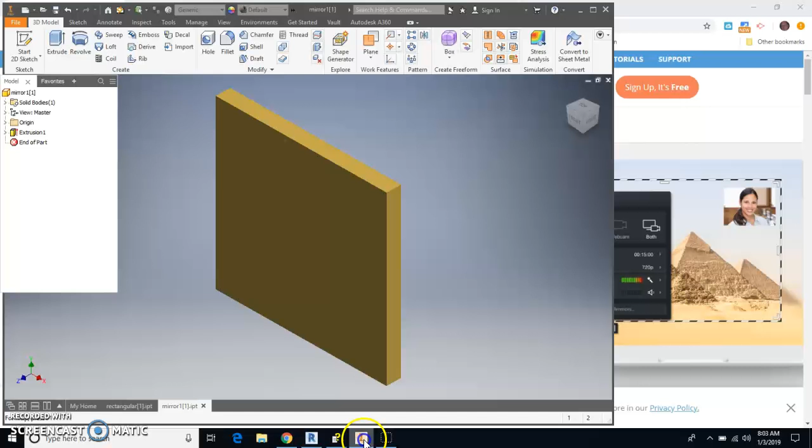All right, next up is the mirror pattern features. And this is quite an involved one. We're actually only going to draw this lower left-hand corner, and then after that, we're going to use the mirror command, the 3D mirror command, to make the other three quadrants here.

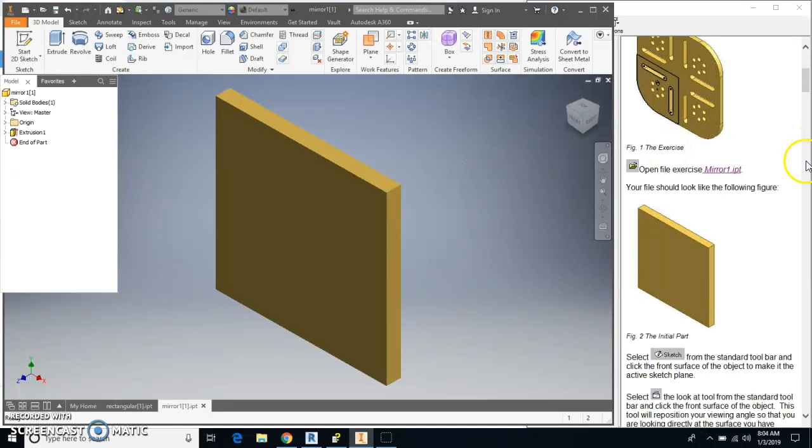So first thing is to click on mirror1.ipt, and make sure you save this. Do a file, save as, and find your H drive, and save this to your H drive. Now, we need to do a 2D sketch right on that front surface, and we're going to make this geometry that is right here on the part.

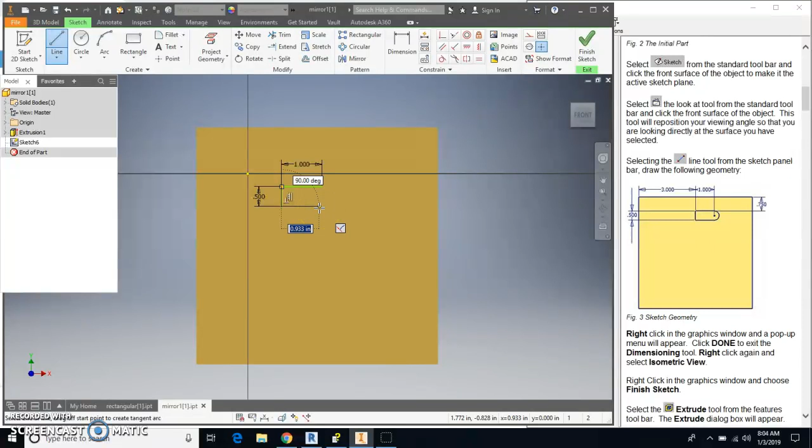So I'm going to start by drawing a line, and I'm just going to draw a straight line that is 1 inch long. And then actually I'm going to restart my line command here. I'm going to come to the left-hand end, and I'm going to come down 0.5 inches. And then back to the right here, 1 inch. Now I'll hit escape. And there's a couple different ways we can do this radius on the end.

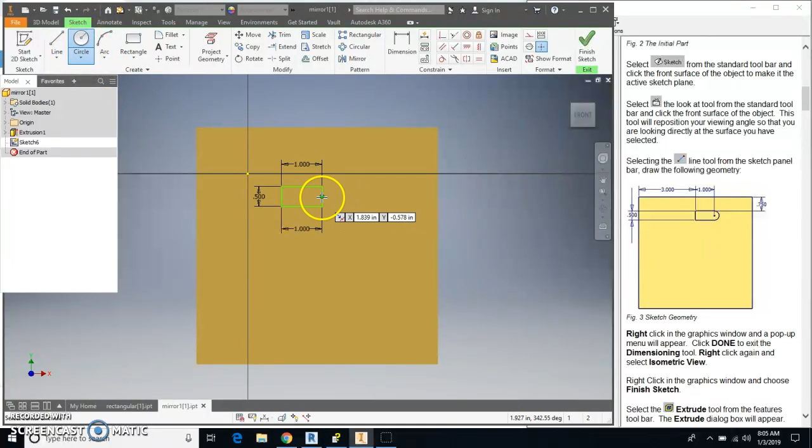Probably my favorite one would be circle center point. That's pretty easy to do. I'll just draw the line here on the end. Oops. Escape. Got to actually get the end of the line. There we go. And then I'll start the circle command. I go from the middle of the line to the edge.

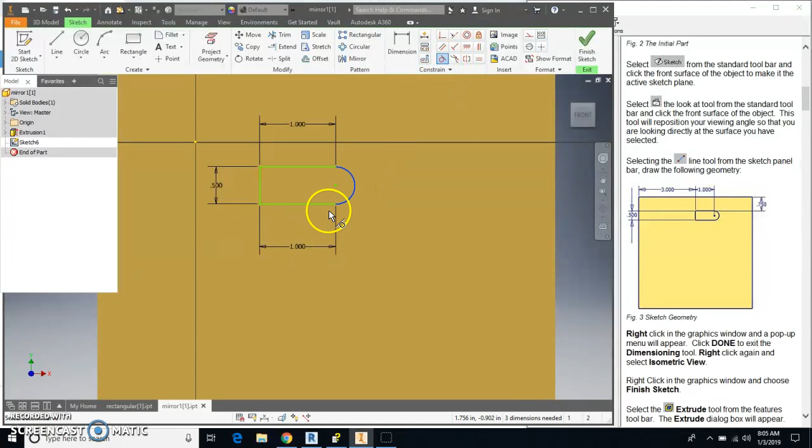And I'll use the trim command to get rid of this inside part here. And then I'll click on that line and just press delete to get rid of that. And that leaves me with that circle. Now, mine looks a little goofy, so you might have to do this. I might not even have to do this. But I just use the tangent command between those two. See, that one didn't need to be there. But anyways, so now I've got this done.

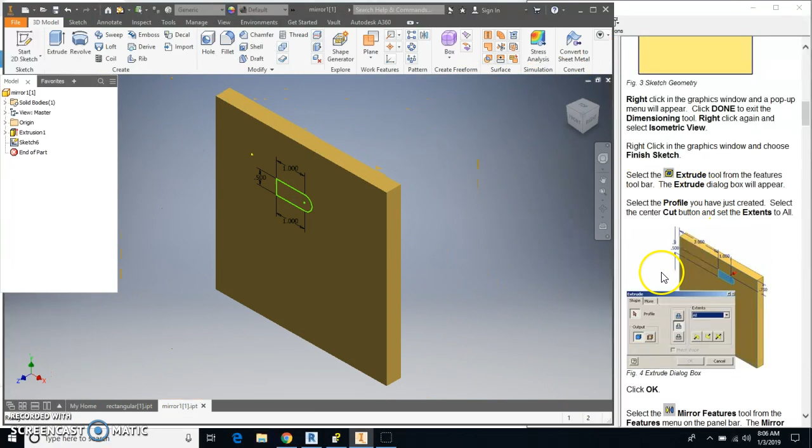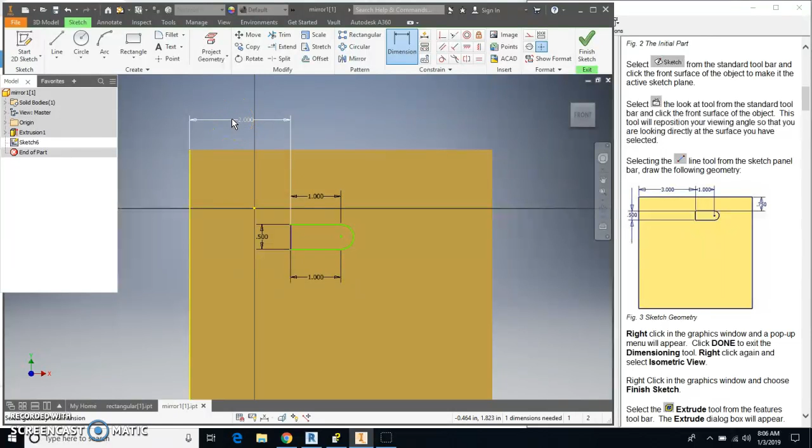Okay. Next thing is I'm going to exit my sketch. Oh, I did goof up. I'm going to double click on the sketch here to activate it. I need to actually place this correctly. I made that mistake there. I'm going to dimension from this left-hand line to that right there, and that is 3 inches. And then we are down from this upper surface here to here, and this is supposed to be 0.75.

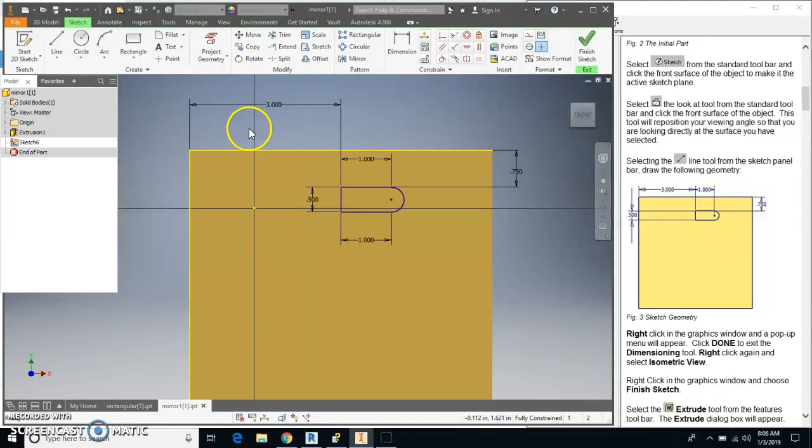And oh, that's not supposed to be 2 inches, that's supposed to be 3. So just double click on that and make that 3. There we go. I knew it wasn't looking right. Now I'll finish my sketch, and I'm going to do an extrude. The profile is going to be that one right there. It's going to be a cut and through all, and I'll say OK.

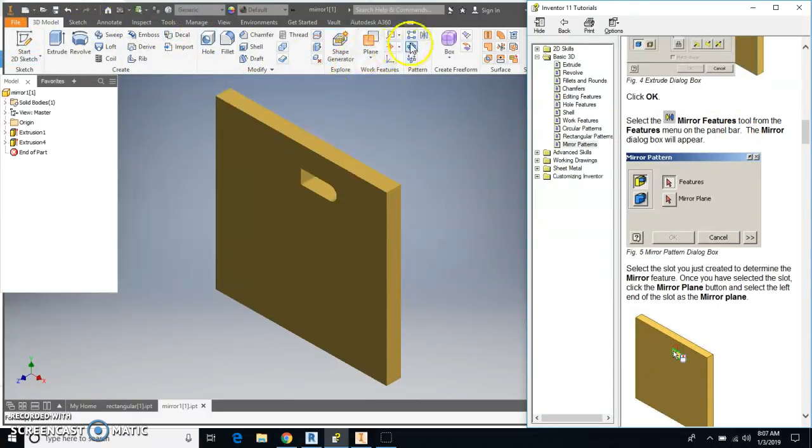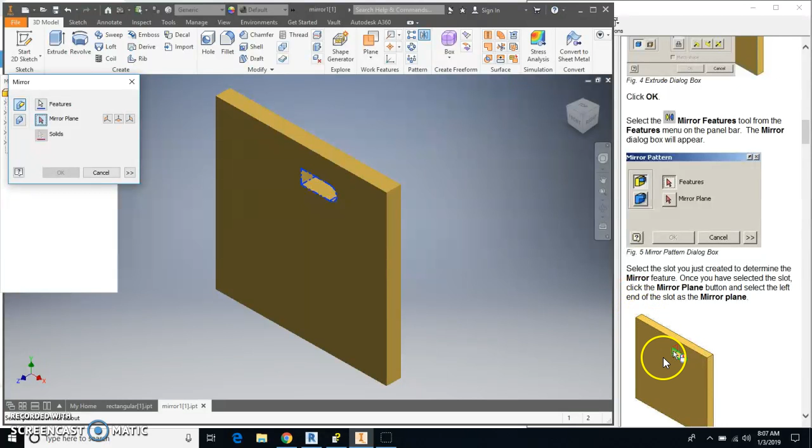Now the next step in this is to do a mirror feature, and the mirror tool is somewhere along here on the top. Here it is. It's above pattern, and what it wants to know is first, what are the features that we want to mirror? And that is going to be that block right there in the middle, the thing we just drew. The mirror plane is going to be that inside surface with a straight line right there. And I'm just going to say OK.

Now we're going to make another slot. This one's going to be going up and down on this surface. So I'm going to start a 2D sketch. And I'm going to start my line command, and I'll draw this one. Well, you know what? Actually, I could use the rectangle tool here and do this, and then just dimension it. So I'm going to dimension the overall height here to 1, because that's the 1 inch right there. I'm going to dimension its location from the bottom to 3.

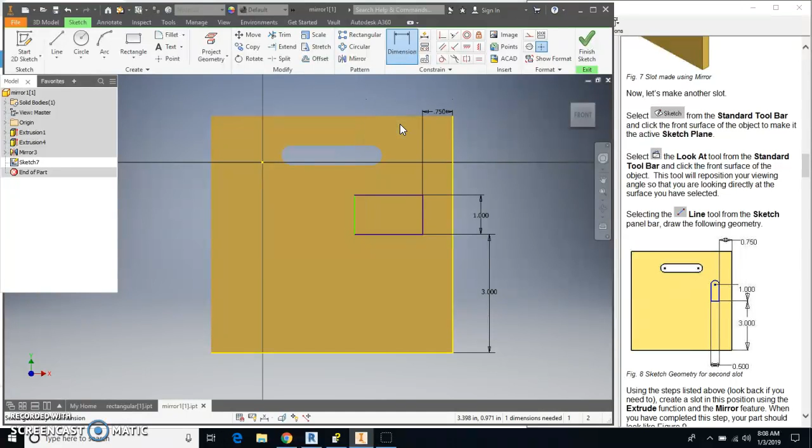And I'm going to dimension its location from the side to 0.75. And then I'm going to dimension its overall width to 0.5. Now again, I have to draw this circle from the middle of this line. So I just put my cursor on here till I get the little green dot, and I'll come over. And then I'm going to use the trim tool to get rid of that piece. And I will highlight this and delete that.

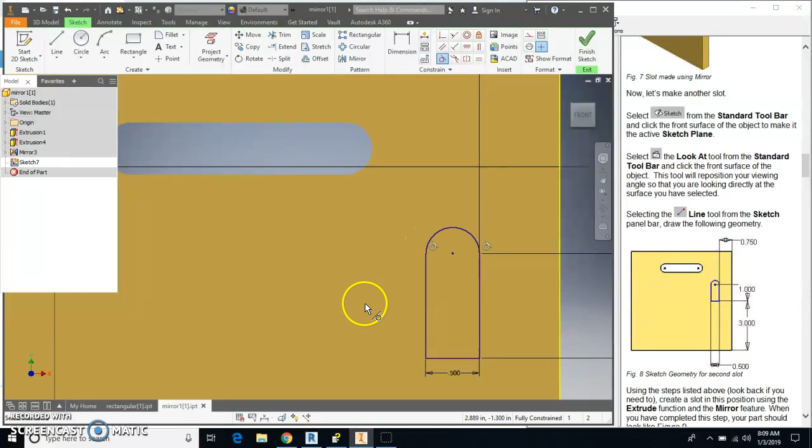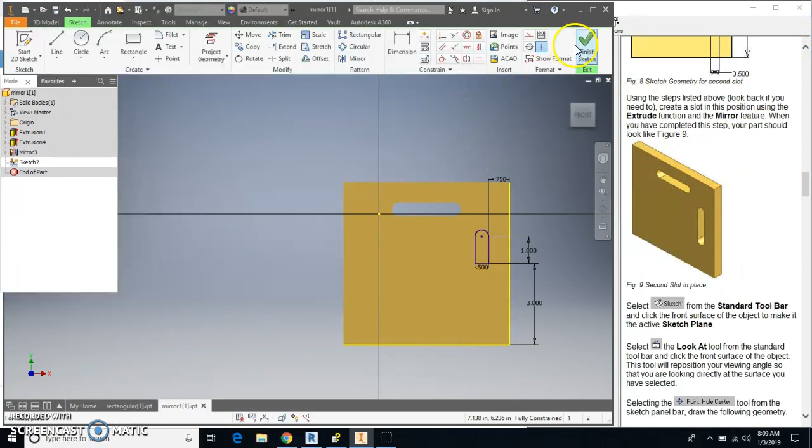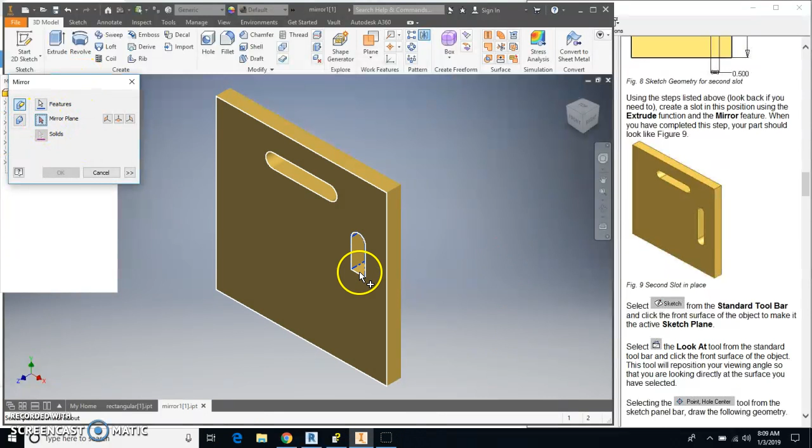And let's do the... there we go. I had to use the constraint for tangency to make sure that where the arc comes into the straight lines was perfectly fine. Okay, so now in the tutorial, we're going to repeat the steps that we just did up above. So we're going to finish the sketch. I'm going to extrude this. It's going to be a cut, and it's through all, and I'll just say OK. Then mirror. So I'll mirror this feature only. The mirror plane is going to be that bottom line right there, and I'm going to say OK.

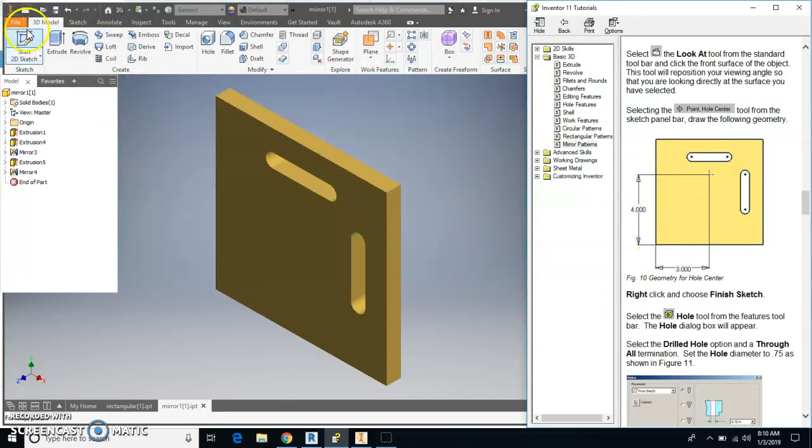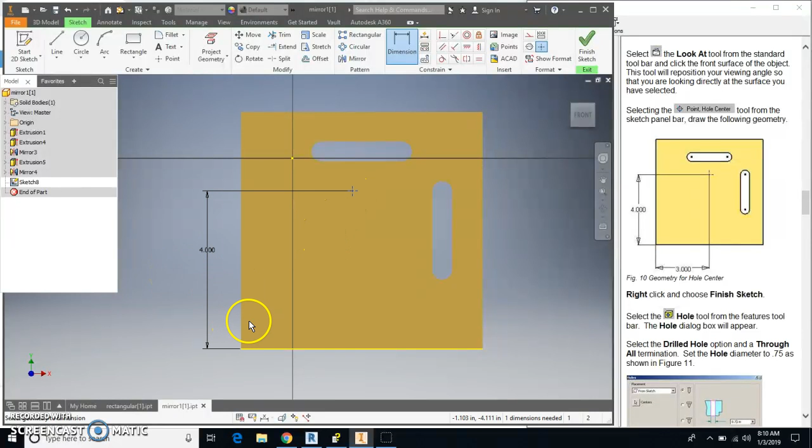Next up, I'm going to put in a work point, and I'm going to dimension it in like this graphic shows me right here. So I start a sketch and I put it on the surface, and I do a point, and I'm just going to click here in space, start my dimension tool, go from the work point to there. I'm going to change that dimension to 4, and then from the work point to the left hand edge, change that dimension to 3,

and I am actually going to finish my sketch, and I'm going to use the hole command. That's going to go through, and I want my diameter of the hole to be 0.75. It's going to be through all, and I'm going to say OK.

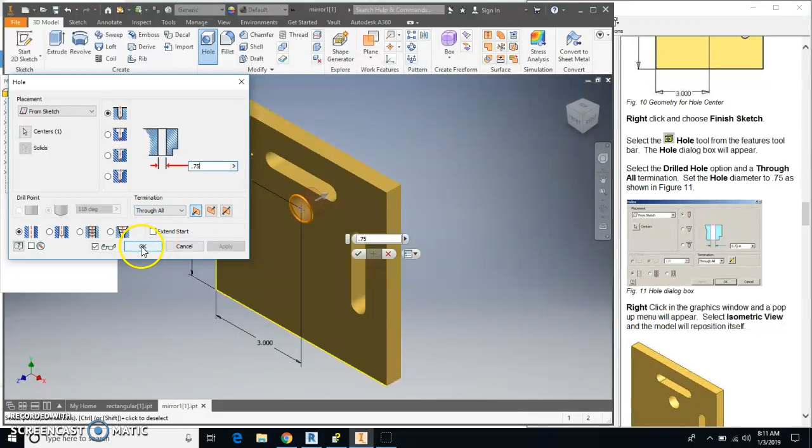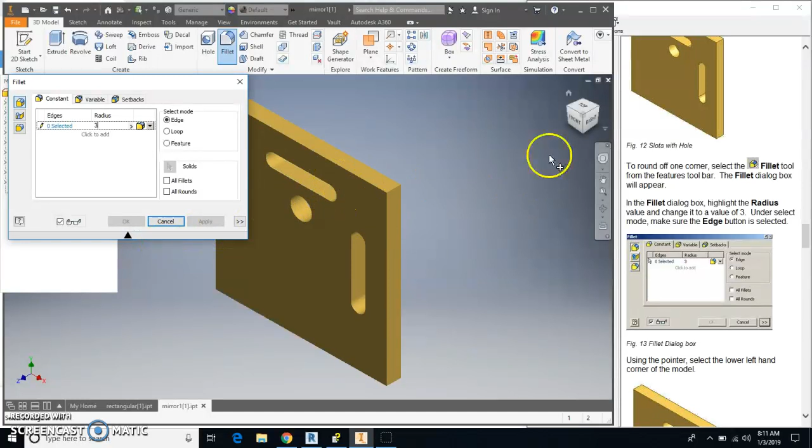Now we're going to round off a corner. It's going to be this corner down here, and the fillet radius is going to be 3. So I'm going to hit fillet. For the radius, I'm going to change this to 3 inches, and I'm going to click on the lower left-hand corner of the view cube, and that's just so I can see this line right here.

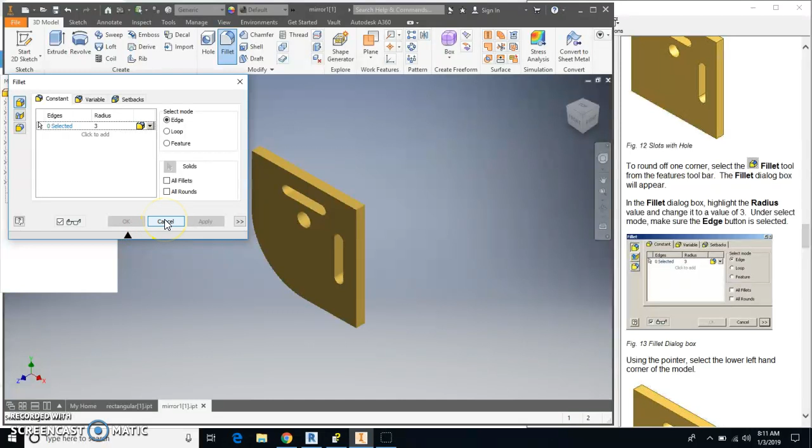And I want to click on that line, and then I can go back and take a look at the picture just to make sure it's what I want, and it is. Let's say apply, and then I can cancel and finish that command out. And I've got just a couple more things to do here. So I just clicked on that, and I said OK, and now I've got my rounded off corner.

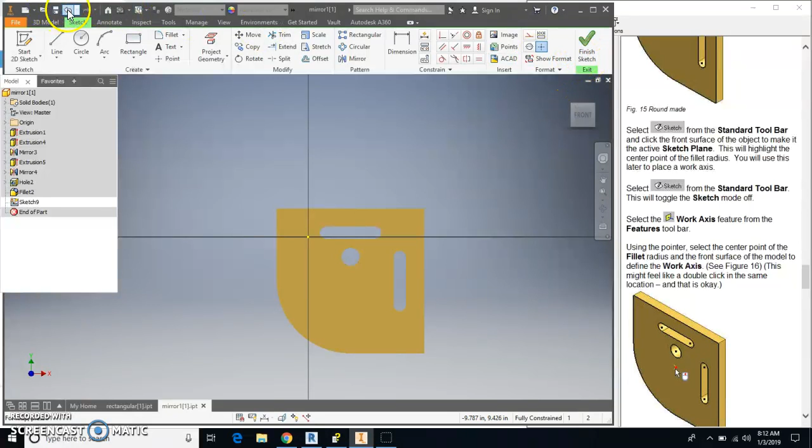Now I'm going to start a sketch again, and I'm going to put it on this front surface. And this time I'm going to use a work axis. Let's see. It's a sketch from the standard toolbar. This will toggle the sketch mode off. Oh, I goofed. So I'm going to undo. Here, take a look at this.

So I want to put a work axis in, and that is right here to the right of plane. All I'm going to do is I'm going to come down here and I'm going to click on that curved surface, and that puts the work axis in for me. So now,

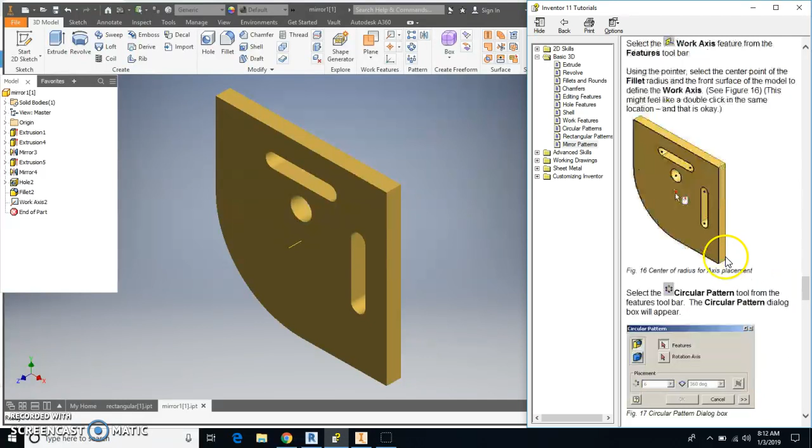okay, so now I'm going to do a circular pattern of this hole. So I'm going to select the circular pattern tool. I'm going to select the feature, which is this hole right here. I'm going to now click rotation axis, which is that axis right there, and I'm going to put in I believe it is 6. Yes, enter 6. So my placement comes out as 6 as a default, and I'll just say OK.

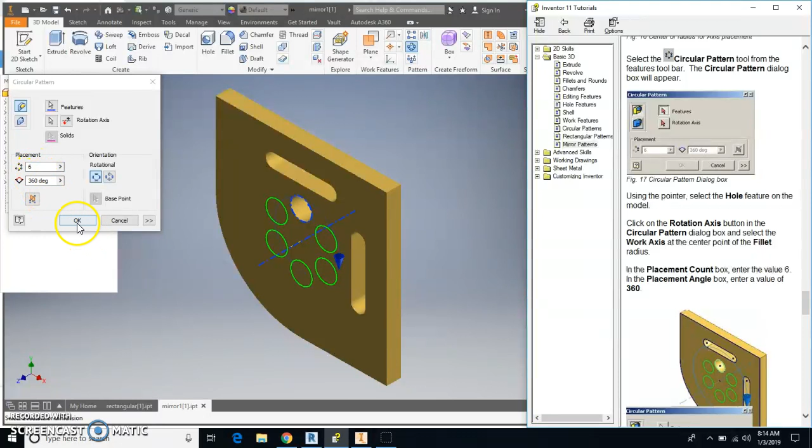So now we're going to use the mirror tool, and we're going to mirror all the features. So we're going to highlight this whole thing, and we are going to do the radius of the fillet. You want to make sure to do that. So

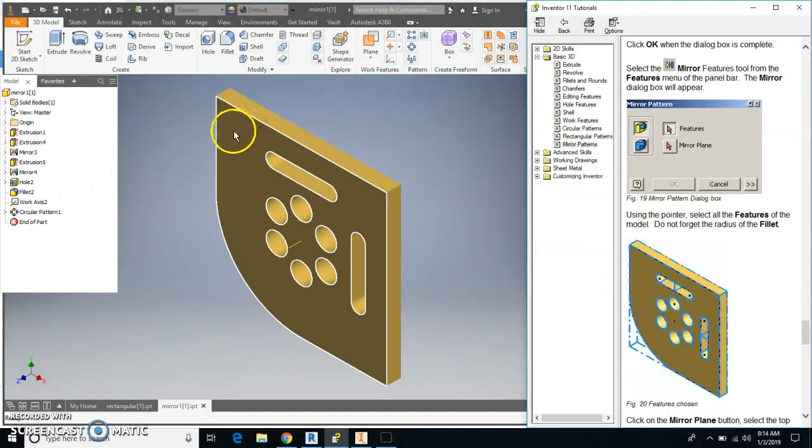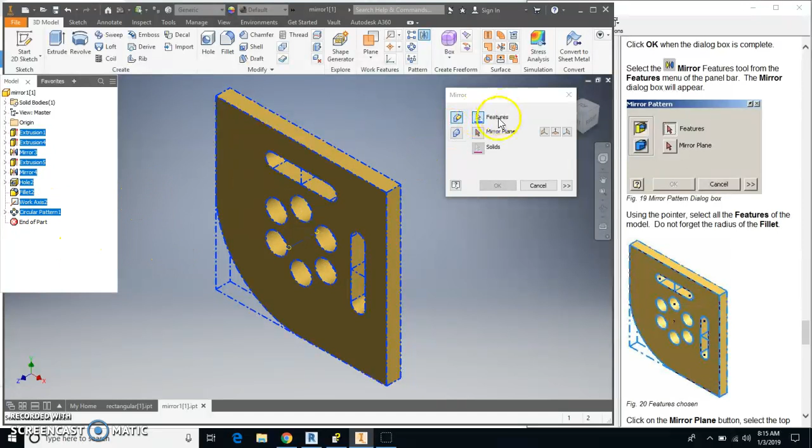mirror is right here. And there's a couple different ways to do this. You can go through and select everything. You can also go right over here and click. I'm going to hold the control button down. Oops. Extrusion, this mirror, this hole, this fillet, this work axis, this circular pattern, and it just selected everything. The mirror plane is going to be that edge up there, and we're going to say OK. And I think we got everything.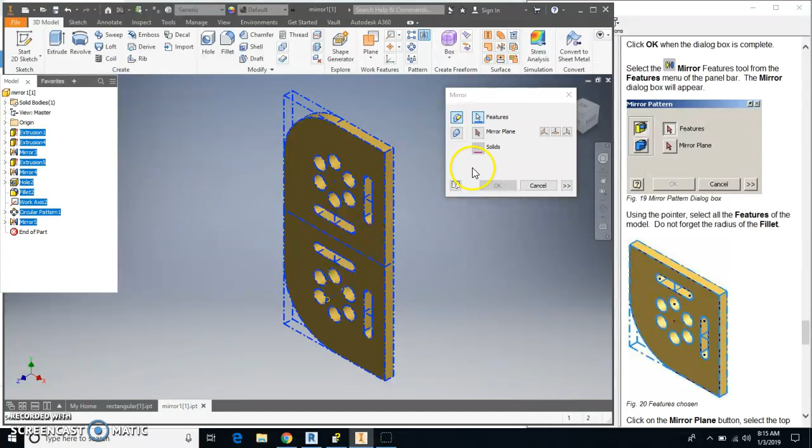Okay. Now we're going to do the mirror again, and I'm thinking that I can do this, and if I hold the control key down, there we go, I can get everything picked. And this time the mirror plane is going to be that surface right there, and I'll say OK. And there is that entire part.

And by the way, if you don't want to see that work axis, you can right click and turn off its visibility to make it not appear any longer. So that is this mirror part.